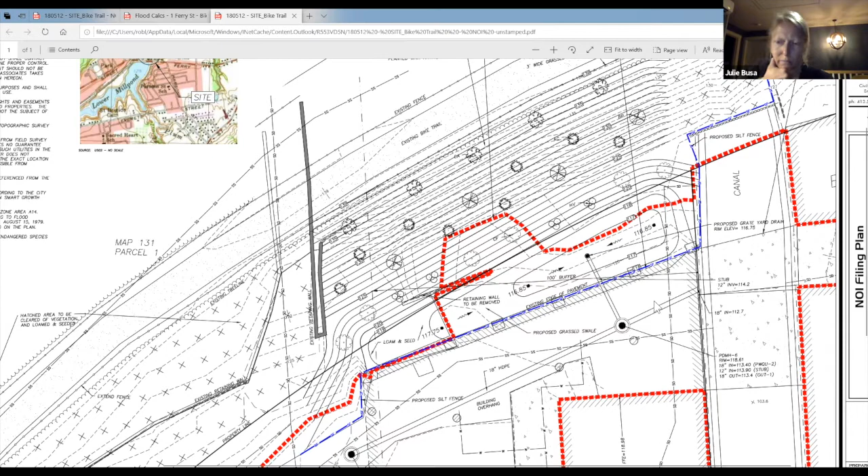It looks like the tree planting is limited to the grading area. What's the intent for revegetating the hashed areas to the sides? It would just be seeding the hashed area above by hand, vegetation by hand, and I think that's just seeding. I don't see any plantings called out for that.

Obviously, it probably doesn't make sense above the canal itself. We wouldn't want any root intrusion. I don't think we're doing anything major in terms of the trees there. Let me see what we've got - serviceberry, dogwood, paper birch. Paper birch could work, but we don't really want any trees over the top if we can help it. We're planting the rest of the slope, so this is really the only area where we wouldn't have any major woody landscape plants.

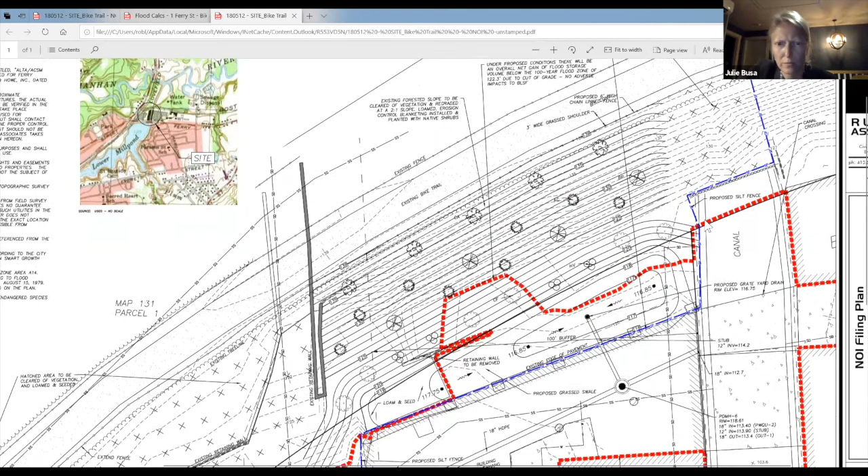What about the area further to the west, over here? Mike, I don't see any plantings proposed over there - I apologize because I know Mike and Ryan went through this in detail. Is the intent to just have that be seeded? Well, it's out of the buffer zone, and we will clean that area up. Myself, Cassie, and Jeff Bagg walked that area - there are a lot of trees in really rough shape. It'll just be cleaned up to be more maintainable.

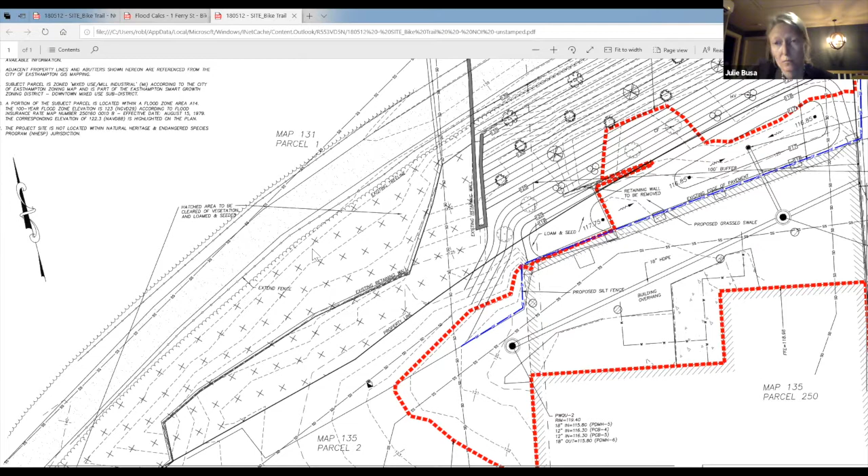So where the callout says it's going to be cleared of vegetation, is it really going to be cleared, or what's the intent? I'm just concerned about the slope destabilizing. We wouldn't do anything to destabilize the slope - if we were going to cut any trees, we would leave the stump and the root in place.

But if you look at that grade, I think it's relatively flat in comparison. No, this is probably more like a 3-to-1 slope here, and this is maybe more like 4 or 5-to-1. It varies obviously.

So the intent, Mike, is to have permission to take out anything in there you want, being out of the buffer zone, and then make sure you stabilize and leave what you selectively would like to leave - is that fair to say? Yeah, correct. We want to be able to - there's going to be a new black chain link fence there. And the trees, it's not shown on the plan, but whatever trees we have up top, we'll carry something similar down that westerly side. Eventually we're going to go all the way to building 3 with a handful of trees, so there'll be a tree belt along the bike path - not directly on it, but 5 to 8 feet away, all the way down to the building we just finished last summer.

Will there be seeding done amidst the tree plantings on the slope where the grading is going to occur? Will there be seeding? Yes. What's the proposed seed mix?

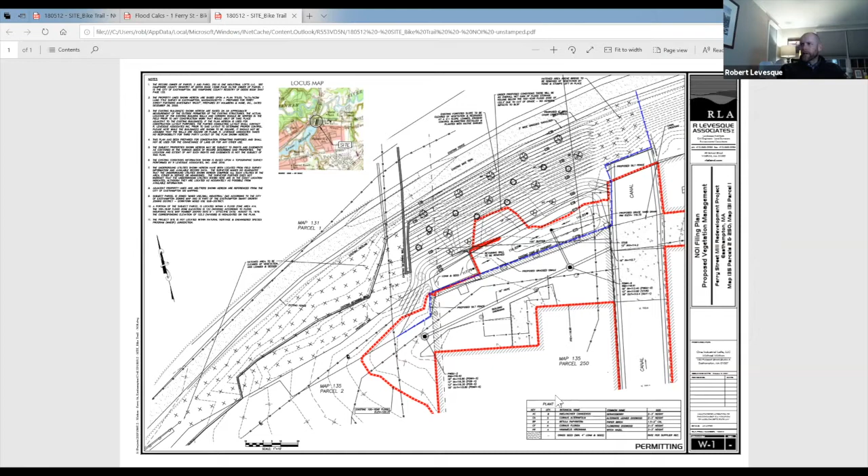I think right now they just have it as grass seed. It should be like a conservation mix. New England Wetland Plants makes a pretty good conservation mix - they also make an erosion control stabilization mix, I forget the name, and I know Valley Green has something similar. Something to that effect, Mike, wouldn't be a problem, right? No.

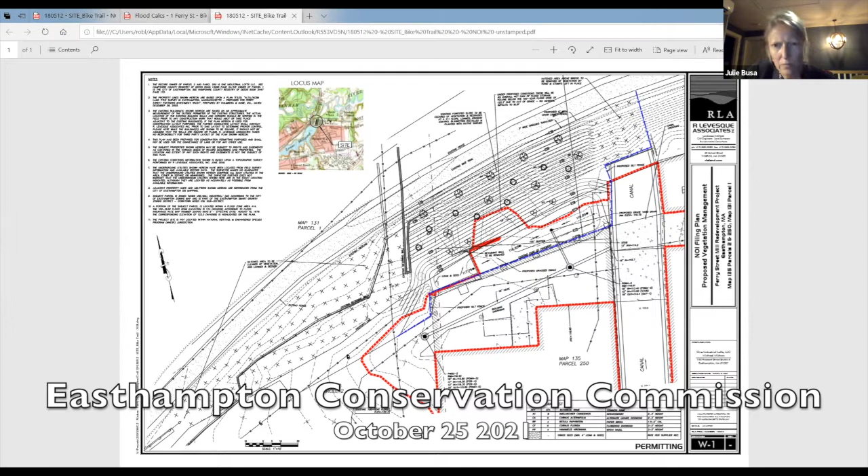And I can't tell, are the erosion controls that are proposed shown on here? Yeah, they're on a different sheet. I'm sorry, Julie, let me see if I can share that.

I know there's a second sheet. I don't know, Cassie, if you have that second sheet handy. I don't seem to have it. Let me see what I can find. Hold on a second. Thank you very much.

I think I saw an erosion control blanket and I have a plan that has a detail. Hold on just a second. On sheet D1, there's a detail that has an erosion control blanket. Right, this is what maybe we want.

Can everyone see that? Yeah, there we go. Perfect. So at the top, obviously the silt fence detail, your erosion control blanket, and then you have a tree planting detail. Let's see if we have any notes.

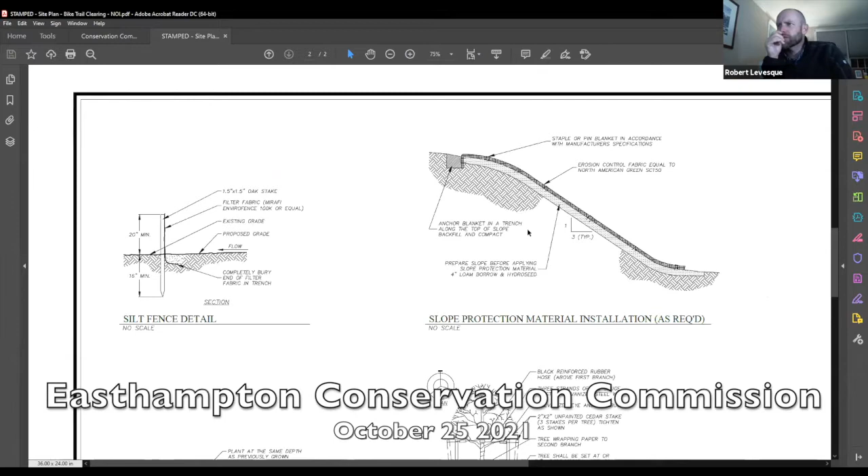We should have some notes on the seeding too. I don't know if we call it out. That's the yard drain at the bottom. Going great. Maybe on the right hand side there might be some notes about the seeding.

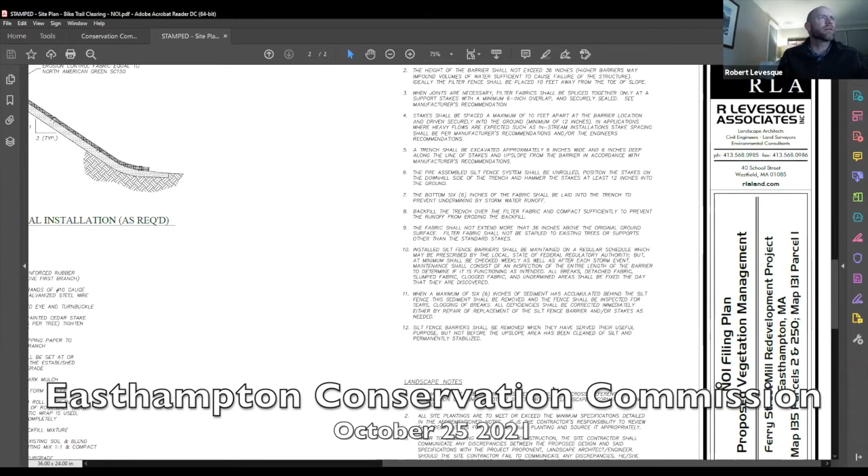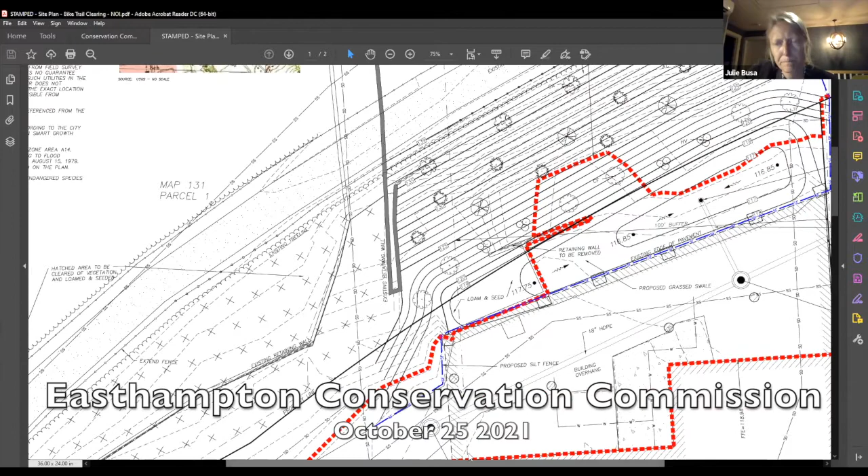So what will be protecting that area at the bottom of the slope where the drain is going to be installed? You mean prior to stabilization? I think we could trench silt fencing at the toe of the slope upon grading, just in case there's any rivulets that get created or anything like that. That would probably make sense.

I think that would be appropriate since that's going to be directly tied into the drainage system. We could ring the area drain with hay bales, or I'm sorry, straw bales, whatever seems appropriate as well.

I have a New England erosion control mix and restoration mix for moist sites. Let me see if I have one for... yeah, there's...

Mike, are you planning on doing this work pretty quickly? This work probably won't happen until next year. Oh, okay. All right, so we don't need to worry about winter rye or anything. No, that'll be fine.

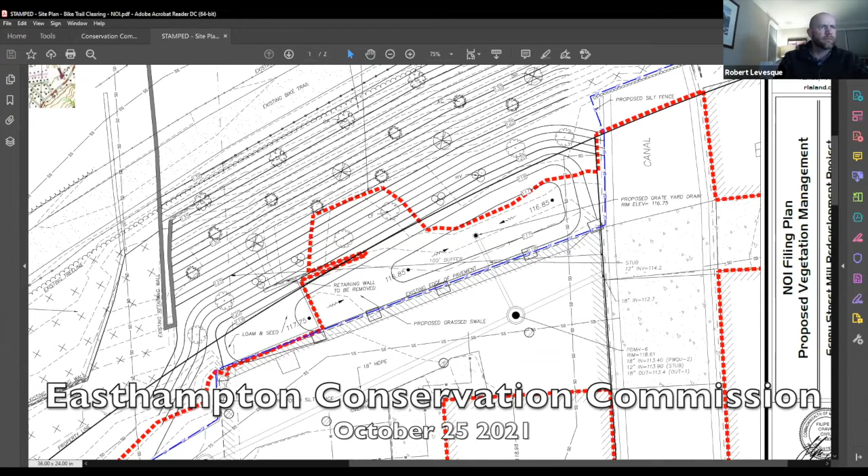So I have a New England erosion control restoration mix for dry sites. That would probably be most appropriate given the slope and the fact that there's really no wetland soil or anything like that along this — it's just a fill slope from the rail.

Any other questions from commissioners?

I'd like to go over, as a due diligence item, the resource areas and the determination of this not being a riverfront area. Because that was a big question that DEP had, and RLA provided really good information about it, so I want to give a little more time to that.

So the DEP comment first was asking why the canal was determined to be a canal. And then, if it is determined to be a canal, does its status as a canal extend beyond the bike path, once it emerges from the culvert.

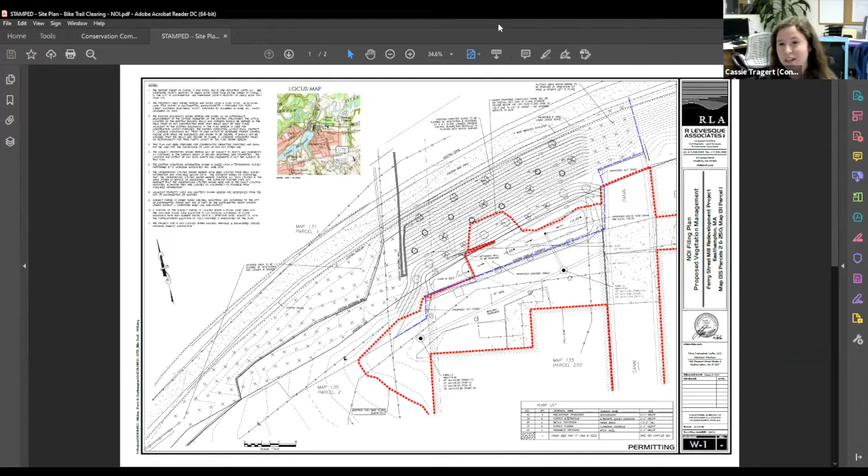So I'm going to share it — actually it was the letter that you guys found from the original order of notice of intent for the first Ferry Street project, that's file number 151-299 and 298. I just want to show that real quick and make sure that makes sense to everybody. Hold on.

It's huge. Okay, so...

This is RLA summarizing what they found, going back, because whatever the commission found to be the case with these areas, for those two existing orders, is what stands as the status of them now, until that order is taken away, gets a certificate of compliance, or expires. Neither of those things have happened yet, so it still stands.

Let's see. And I don't know if maybe Rob, you can give an explanation of this better than I can, but basically...

Mr. Fallis from DEP is retired now — he doesn't work for DEP anymore, but at the time he did, and he made the determination that it was a canal because the river was diverted and changed its location as a result. It wasn't just channelized, the original location changed. What used to be Broad Brook, and then that man-made structure continues on after the culvert, is basically how it's being explained here. Does that match up with your understanding?

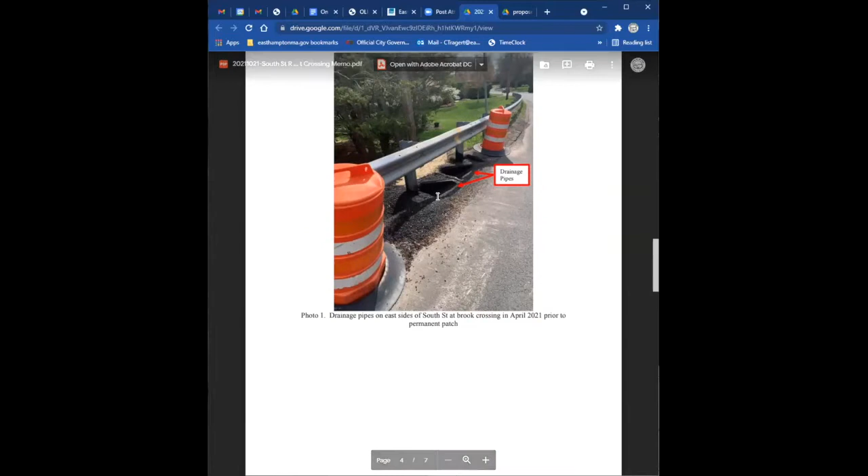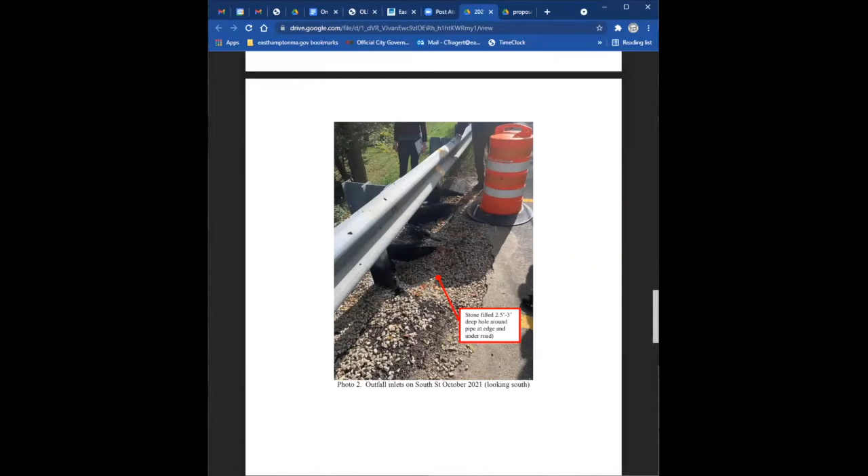They're starting to slide down the embankment as well, which is creating even more erosion. We did some quick survey points, and it's down about a foot from where it was in April. So we're requesting to put a catch basin right adjacent to where those two outfalls are, collect that stormwater, and let it out through an 18-inch pipe instead of two 12-inch pipes, in the same location but at a much lesser slope, out into Wilton Brook where those are currently located.

And Diane, I don't know if you said this already, you were thinking it was potentially fit under work category 5? Yeah, I believe so, we're hoping that it could be covered under the bundled NOI item work category 5.

Basically, we're not planning on doing any in-water work. There wouldn't be any need for bypass pumping or anything like that, since this would be done on a dry day. It's basically replacing the existing system, putting the pipe in the same location it is right now.

And with the catch basin, we're proposing a 3-foot sump to collect some of the sediment prior to it making it into the brook. We would like to put a deeper one, but with the culvert there, we feel more comfortable just putting a 3-foot sump in.

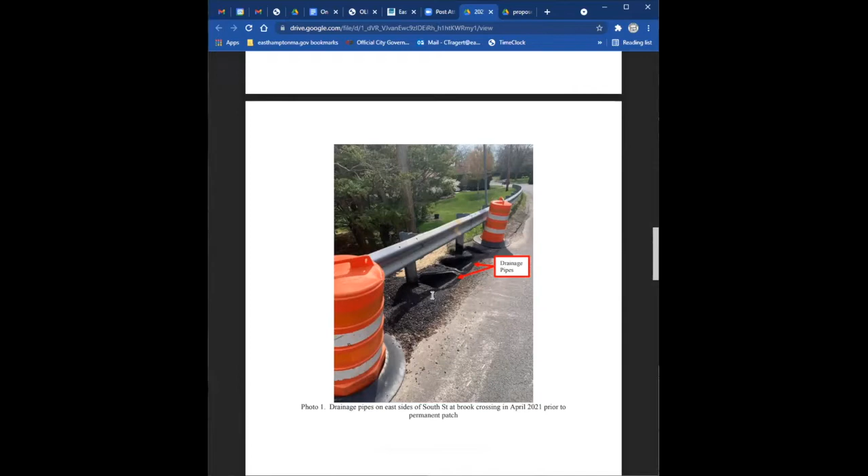Diane, do the pipes currently run all the way under the road, or remind me where they pick up? They collect right there at the low point of the road, right where the culvert is, and just run down the slope. They're not very deep, and they're at almost a 45-degree angle—I didn't measure it, but visually it looks like about that. So they do not go under the road, got it. This catch basin really wouldn't take anything else, it would just be taking the surface flow from the road—there'd be no pipes coming into it.

I have some pictures from the site visit I can share that might give a better idea. When the guys went out there was about a 2.5 to 3 foot hole at the site. They filled it with stone to keep it stable and stop it while we talk to you guys, but it's starting to undermine the road.

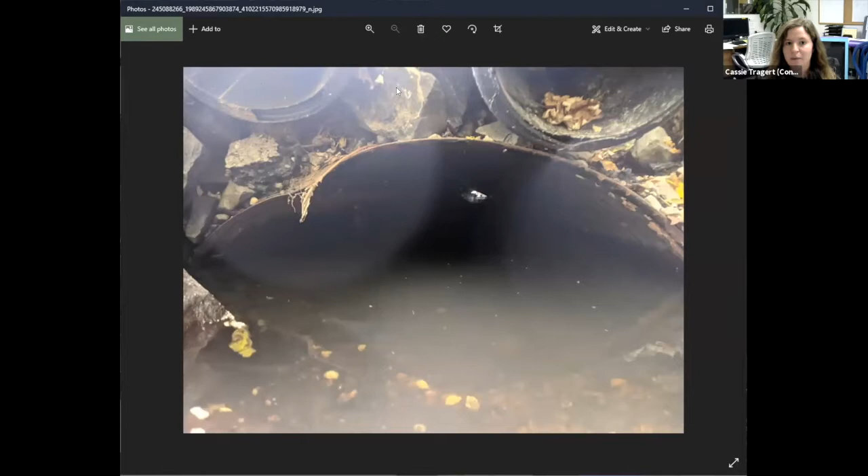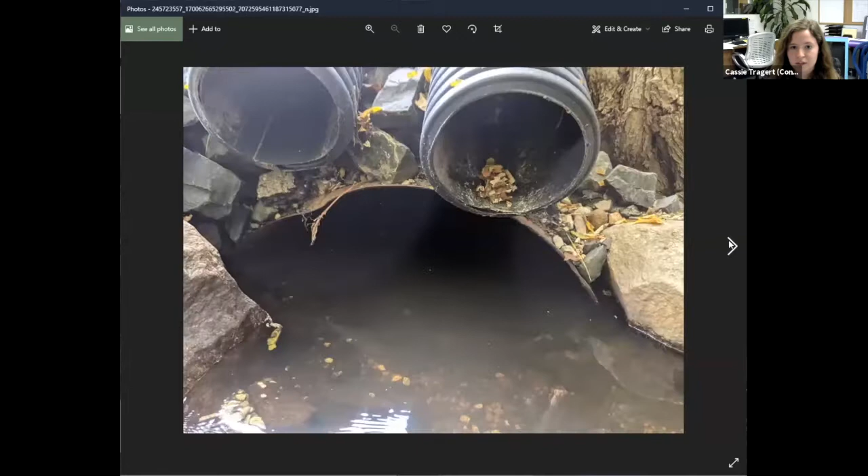This is the culvert that goes all the way under the road. This is the end point of those two inlets at the edge of the road. Here's the same thing from above—these are the inlets just getting swamped. Same thing with the outlets. They put that stone because the area was starting to slide away.

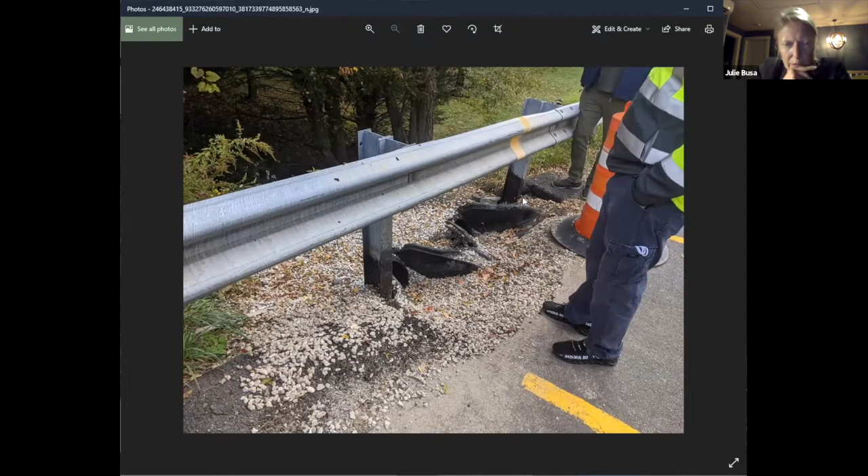Is there evidence of any other sinkhole activity on top of the culvert at other points along the road? No, it really seems to be localized. Cassie, do you have any zoomed out pictures at all? I have some at the office, but I'm not there currently. Yeah, that's as good as I've got. Okay, it seems very localized to that one spot.

And so the catch basin will sit over that culvert? Correct, and we did take some shots out there—it's about 10 feet down from the edge of the road. Is there any concern about running into issues when you dig to put that catch basin in, that would require more work on the culvert? We don't think so. That's why we're trying to keep at least 3 feet separation, and why we're only suggesting a 3-foot sump instead of the typical 5, to keep enough cover in between.

So it'd be like a 6-foot structure overall. It's a little over 3 feet, 3 to 4 feet, because we just took some quick grades—we didn't do a full survey out there. We just wanted to get an idea of where that culvert was in relation.

And basically, Diane, correct me if I'm wrong, but this is proposed to be like a permanent solution to this problem? Correct, we don't anticipate there would be anything else. Before there was talk of doing something smaller and quicker, but the hope is this would be the final thing that needs to be done. Correct.